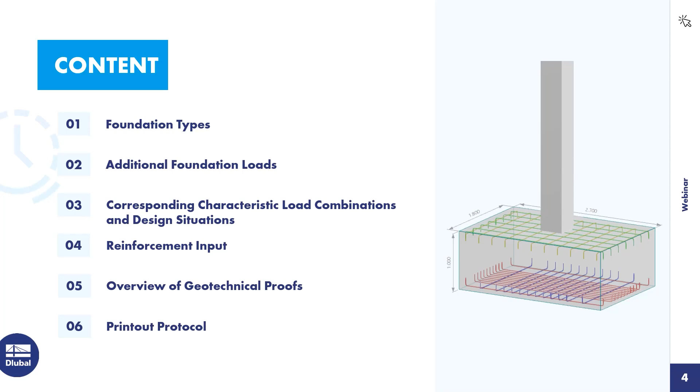I already created a steel hall with concrete columns and concrete foundations for you. First, I will show you the basic settings where the foundation add-on needs to be activated. You can find it here at the top. Under the add-ons, you need to make sure that the concrete foundations are activated. Concrete design doesn't necessarily need to be activated, but since I have a model with concrete columns here, I activated this for this webinar. However, for the design of concrete foundations, you do not need this.

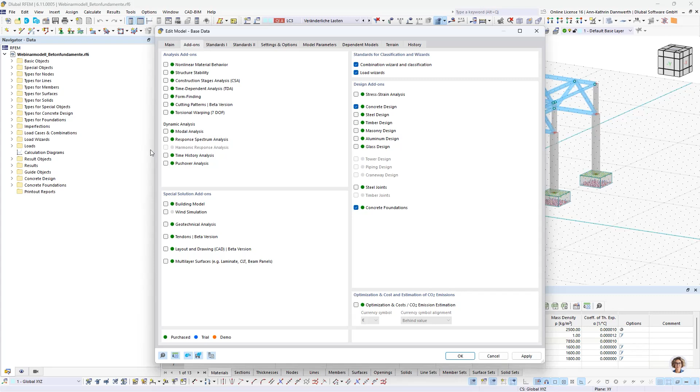Once the concrete foundation add-on is activated, we get new folders in the navigator, which I will now show you. Here we get the types of concrete design. Normally we won't get effective length, reinforcement directions, surface reinforcements, or punching reinforcements here, but only the concrete durability, as we need this for the foundations. Additionally, new types for foundations have been added. Here you can create foundations individually and edit them.

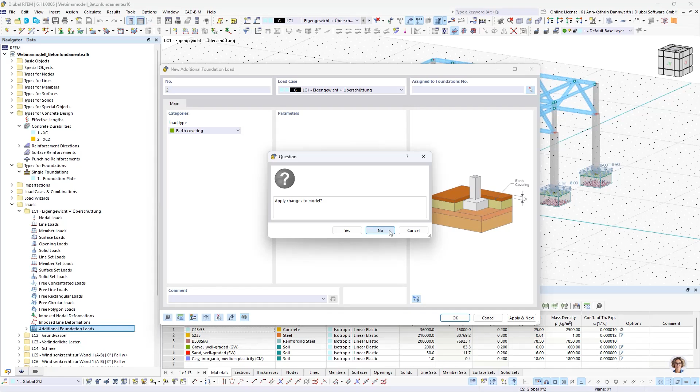Also under loads, when I go to load case, a new point for the additional foundation loads has appeared. Here you will find everything such as earth covering, surface loads, line loads, concentrated loads, and groundwater. At the very bottom, another tab for concrete foundations has appeared. Here you can view and edit the design situations as well as the objects to be designed and the design configurations for the geotechnical proofs or concrete design.

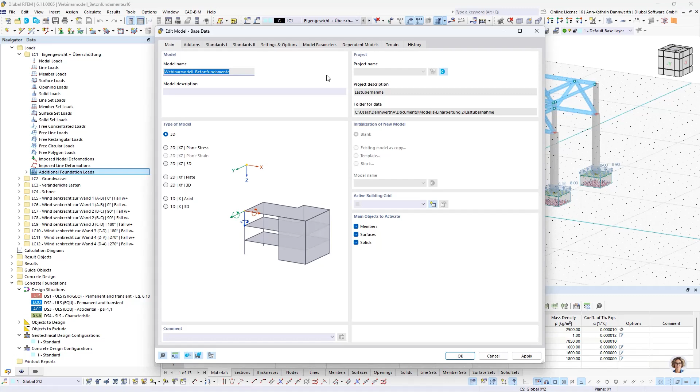What I forgot to mention in the basic settings is that if you want to generate snow or wind loads using our load generator, it would be helpful to provide your location or these data under model parameters. If you don't want to enter them manually, you can simply select the location on the map and the latitude, longitude, and altitude will be automatically filled in, but they can also be modified here.

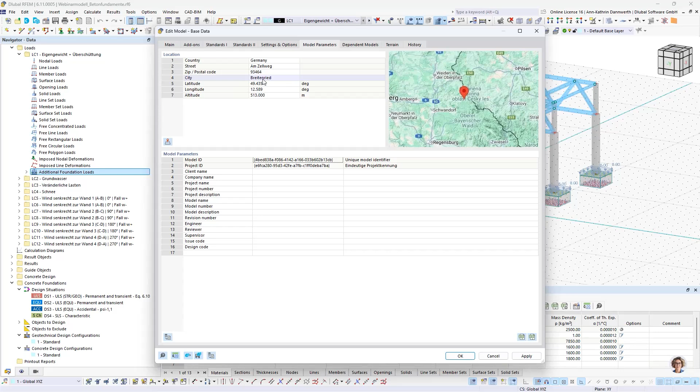I will show you now what has been modeled so far. Let's go into basic objects and materials. Here I have steel, concrete, steel for reinforcement, along with three different soils. When creating a new material, we can go to the library to load all kinds of soils. You can find them here under material type soil.

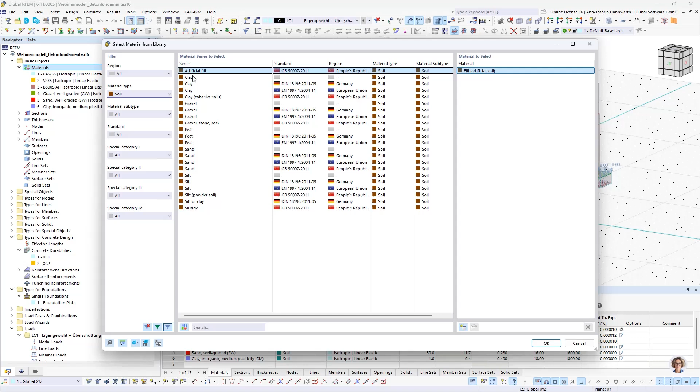I simply pick one of those now to show you the basic model parameters. However, you will likely receive different values from your soil report, so you can easily change the values in the material properties so that they are correctly considered in your verifications. Next, let's move to the cross sections.

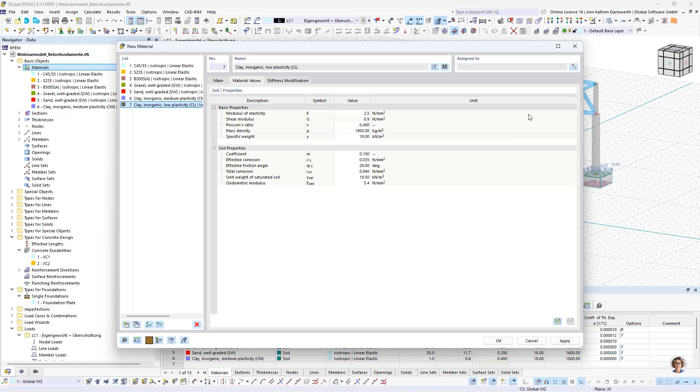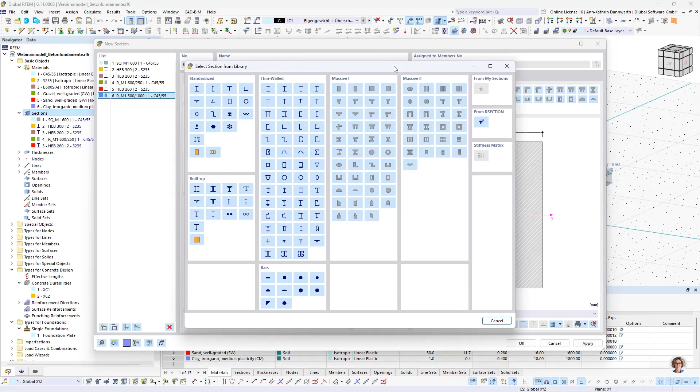I've created 2 rectangular cross sections made of concrete and 3 different HEB beams. They can also be easily loaded from the library, just like the materials. Here you have different selection options.

From this point on, it becomes interesting for the foundation modeling. Foundations must be assigned to supports. To do this, I will open the support type for nodes folder and access the nodal support. I've already created one here. I can either create a new one or edit the current one.

So I have now set my support with my support conditions and would like to assign a foundation. To do this, I need to check the box foundation. When I do this, I get a new tab for foundations, and now I can select the foundation I want or create a new one. However, there is another way to create it. I will walk you through that method.

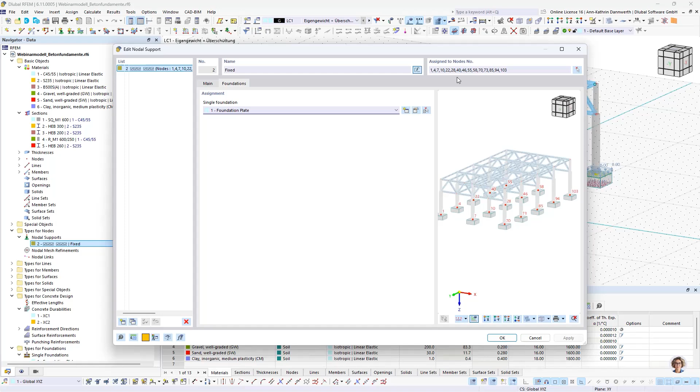The one here has already been prepared and defined. At the top, you can see all the nodes assigned to the support, and this foundation is then assigned to the support. Accordingly, these are also the nodes for which the foundation slab is defined. Now I will go to foundation types and create a new single foundation.

Here you can determine the type of foundation, which can be a foundation slab with or without reinforcement, a block foundation with smooth bucket sides or with rough bucket sides. You can also, when you select one of them, see the graphic over here. Then we have bucket foundations with smooth bucket sides or with rough bucket sides.

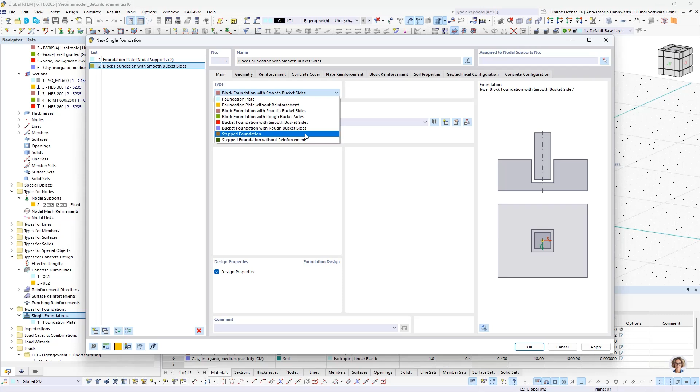And newly implemented are stepped foundations, again with and without reinforcement. So far, only the geometry of the step foundation can be determined, as this type of foundation is still under development. Let me go to the foundation slab now. In the second tab, you can create the geometry.

You can define the slab geometry with the dimensions of the slab and the slab thickness, as well as the eccentricity of the column above it. If a node or support has already been selected, the support dimensions will already be filled in here. The program automatically retrieves them. You can also define a base plate at the foot of the support.

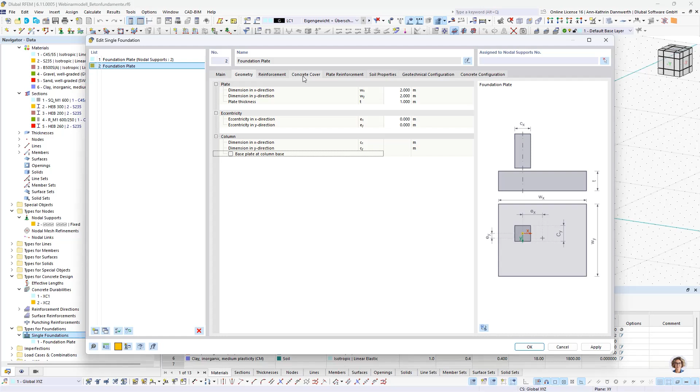This is very helpful because in the steel joints add-on, the geometries are also directly transferred, and anchors or reinforcements can be applied and designed there. I'll say something about the reinforcement later. Let's go back to the concrete cover. This can be controlled via this tab. Here you can also see the durability.

You can set different minimum concrete covers for the top, bottom, or sides. These values are automatically determined by the concrete durability settings. Alternatively, you can set these manually and adjust them as needed.

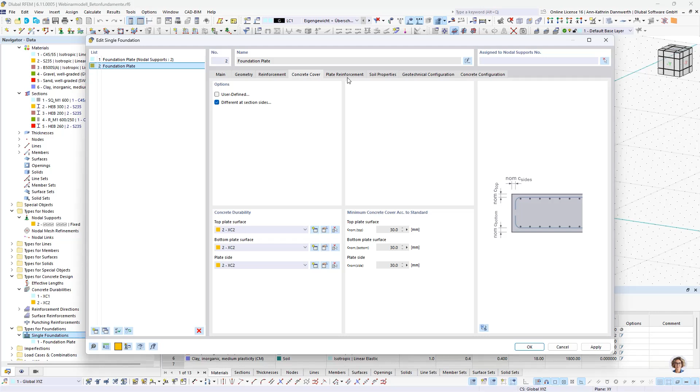Next, let's move to the soil properties. Here you have the settings for the subsoil. The conditions can be created as drained or undrained. For the definition type, you currently only have the single layer option. The multi-layer option is still in development. This can then be controlled through boreholes, or if you have the geotechnical add-on, you can define them in the future via a soil massif.

Here you can also set the soil parameters for friction angles, groundwater level, and earth covering. However, I first need to pre-enter something in the soil layers. The gravel was automatically selected because it's the first material of the soil type. So that would be region A below the foundation. Region B would be beside the foundation. I can define that here. I'll just add sand for now.

If I want to have earth covering, I also need to fill in region C. Then there is the option of earth covering here, and I can enter the thickness. Let's say it's 1 meter. I can see that directly here. That's 1 meter above the foundation node.

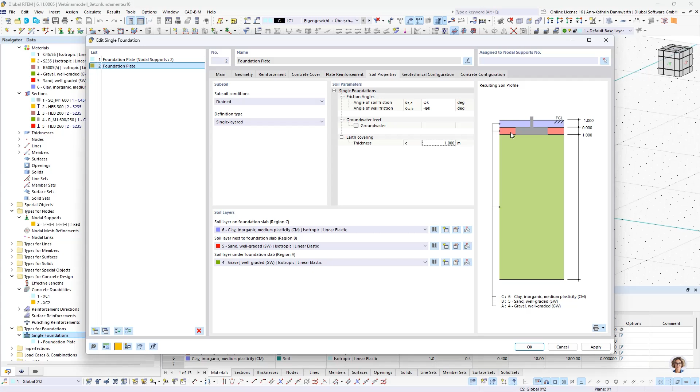Now let's move on to the geotechnical configurations. Here you'll find all the safety factors and other factors you need for design verifications. These can be controlled by reviewing or editing the geotechnical design configurations. The parameters you just saw can be set here in the standard parameters.

In the basic settings, you can also deactivate design loads if you don't want them. You can also assign different design configurations to different foundations. Accordingly, you can decide individually for each foundation which settings should be activated or deactivated for the foundation design.

For ground failure, there are two options for determining the ground failure resistance. It can either be calculated according to the code, or you can manually enter a characteristic value. For the sliding verifications, there are also adjustment options. Here you can control whether the equilibrium, uplift, or the large eccentricities should even be considered for the verifications.

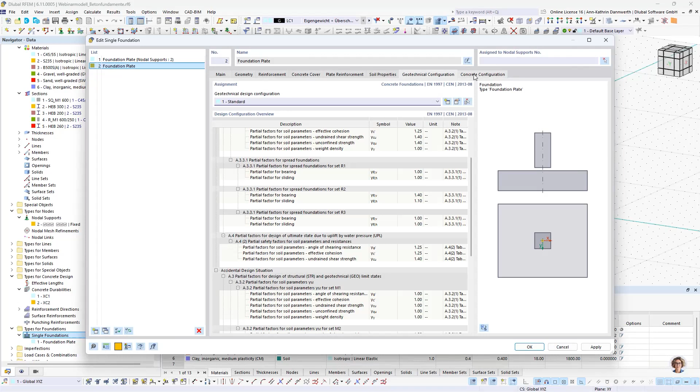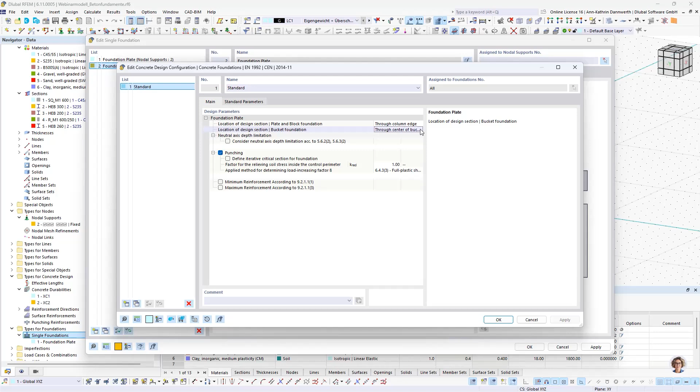Now let's move on to the concrete configurations. This section is similar. There are many safety factors here, as well as material parameters and ultimately everything we need for the design. You can adjust these here. In the basic settings, you can also determine whether punching shear should be considered in the design and how the handling of the minimum and maximum reinforcement should be managed. The position of the design section can be set here at the top.

Now let's move on to the additional foundation loads. To do this, I will go to the Loads folder into load case 1, and here to the additional foundation loads, where I will create a new one. For the load types, we have surface loads, line loads, and concentrated loads available, as well as earth covering and groundwater. The surface load can be applied to the entire foundation by simply assigning the foundation and setting the load size.

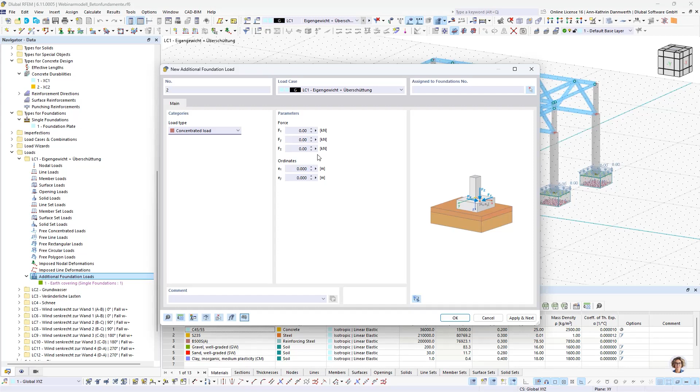Line loads are similar, but here you can also define 2 points on the foundation between which the line load should act. These ordinates have the node of the foundation as their center. Let's move on to the concentrated loads. This works the same way. You can determine the location of the concentrated loads through the ordinates, again depending on the node of the foundation, and define the components in the X, Y, and Z direction.

The earth covering is automatically generated by the system. You can control this through the soil properties when editing the foundation itself. The same goes for groundwater, which is also automatically created. I will go back to show you.

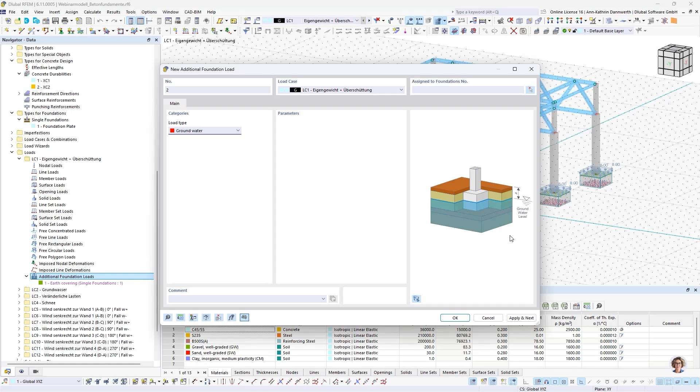In the self-weight load section, I have enabled earth covering, and that's why it appears purple here, since it has been automatically generated. If I go back into the foundation, into the soil properties, this is where I can define it. The weights from the earth covering are also considered here. So there's no need to calculate the earth covering or convert it into a surface load manually.

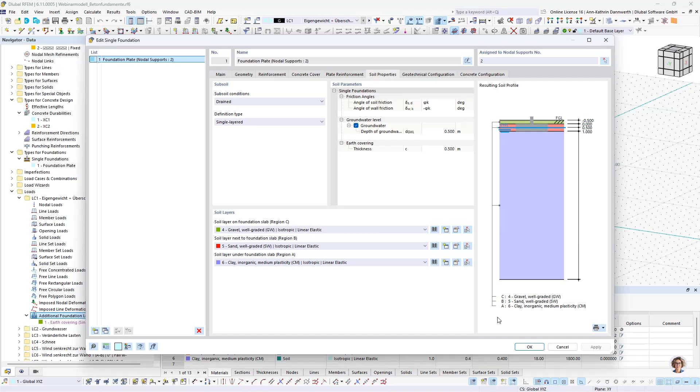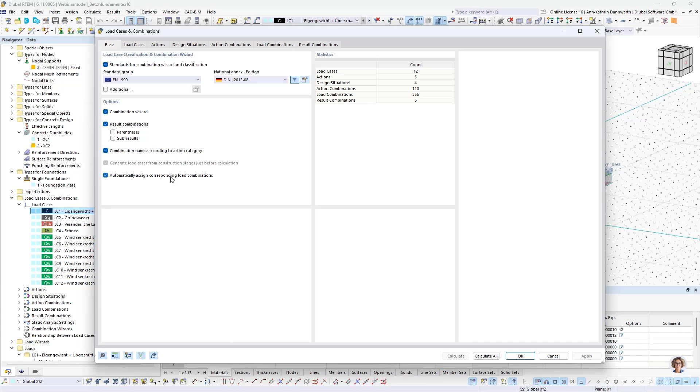Now, let's move on to the corresponding characteristic load combinations and the design situations. To do this, I will go into the load cases and the basic settings. If the combination wizard is enabled, the box for automatically assigned corresponding load combinations should also be checked. Accordingly, you will later have the load combinations generated by the combination wizard in the load combination section. Therefore, you will later find the combinations generated here, and the corresponding combinations should also appear.

The ground failure and the sliding safety verifications can only be carried out with the assignment of these characteristic loads. Manual assignment is also possible. So if you don't want to use the load combinations from the combination wizard and prefer to create them manually, you can also add the corresponding characteristic loads via this drop-down menu here.

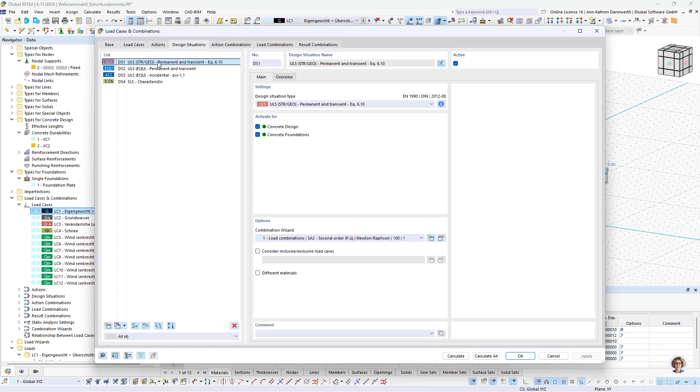Now, let's have a look at the design situations. For the geotechnical verifications, we need the ULS, ultimate limit state, for permanent and transient loads. We also need the design situation for equilibrium of structures for both permanent and transient loads. You can set all of them here. In addition, the one for accidental influence, and of course the characteristic one, which we definitely need to assign.

What I forgot to mention earlier is that for the additional foundation loads, we need to activate the self-weight for the concrete foundations in the load case, where the earth covering should also be considered. This will add a new tab at the top. When we go to this tab, we can specify exactly what should be included in load case 1. In this case, I added the active self-weight of the foundation structure to the self-weight and included the earth covering.

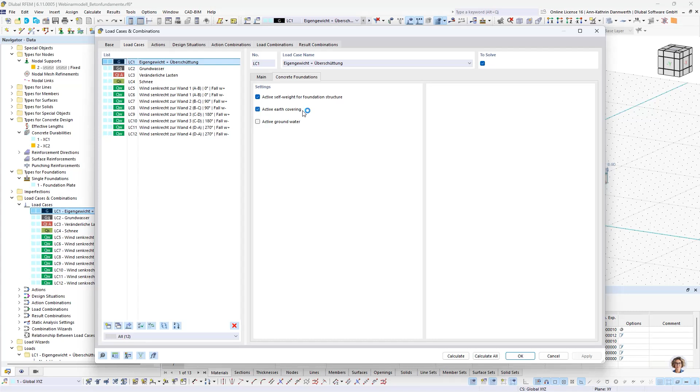I placed the groundwater in a separate second load case because it can also positively affect the verifications. You can see that here. Now only the active groundwater is included in this load case.

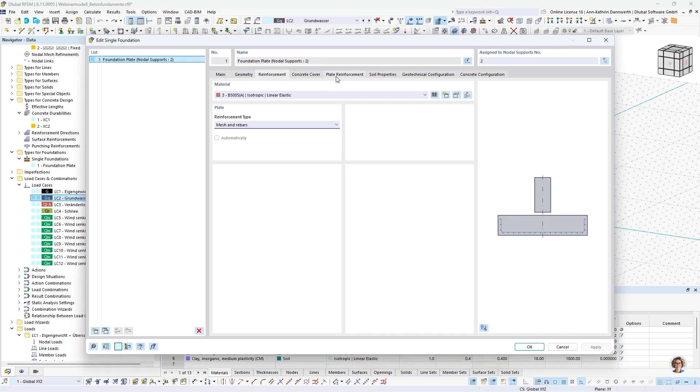Now let's go to the reinforcement input, which I skipped earlier. For the foundation plate, you can define the material and the reinforcement type here. As mentioned earlier, you can choose from mesh reinforcement, reinforcement bars, or a combination of both. I've chosen a combination of both here. I will then go into the plate reinforcement. Here I can define what I want to lay for the upper and lower reinforcement individually.

First, we have the definition of the mesh. Again, there's a selection of various meshes I can choose from. The bars can also be defined in the X and Y directions, with diameters and spacing. The same applies to the lower reinforcement. Here I can define the mesh and the bars in the X and Y direction. What might be interesting here are the areas 1 and 2.

Area 1 is the outer quarter, both left and right. Area 2 is the middle section.

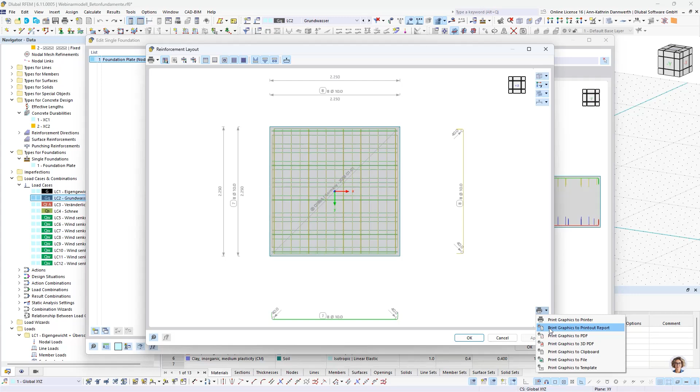But I will talk more about that shortly.

I also wanted to show you the reinforcement input for the bucket foundation. Here I will choose a bucket foundation. The geometry does not yet have a support because I have not assigned a node or a node support yet. I will do that quickly.

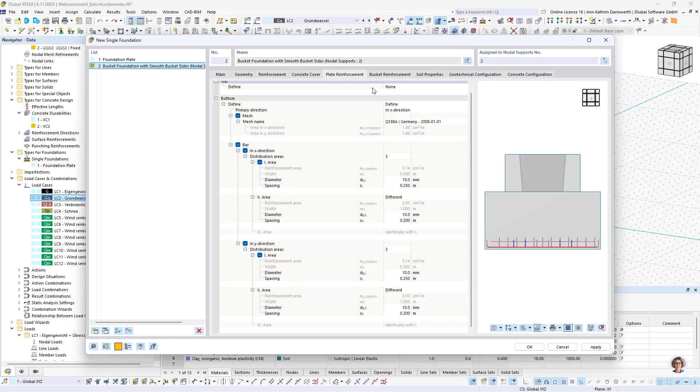Now we can go into the plate reinforcement. It looks the same as with the foundation plate. The bucket reinforcement has now been edited as well. Here you can define the horizontal stirrups first. You can also define the vertical stirrups in the walls in X and Y direction.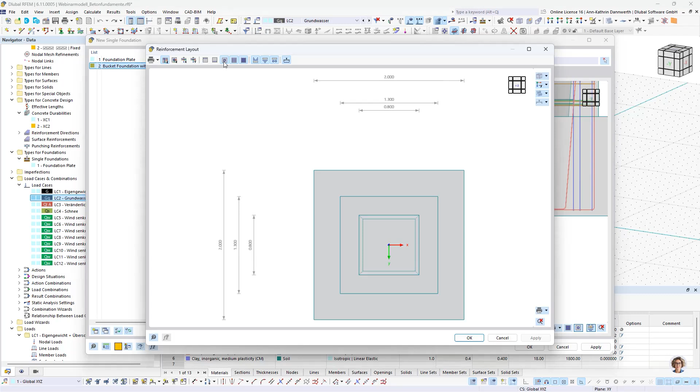Let's take another look at this. To display the bucket reinforcement, this button must be activated. I've turned off the other two for now. And here you can choose between different views to display the bucket reinforcement in all three views.

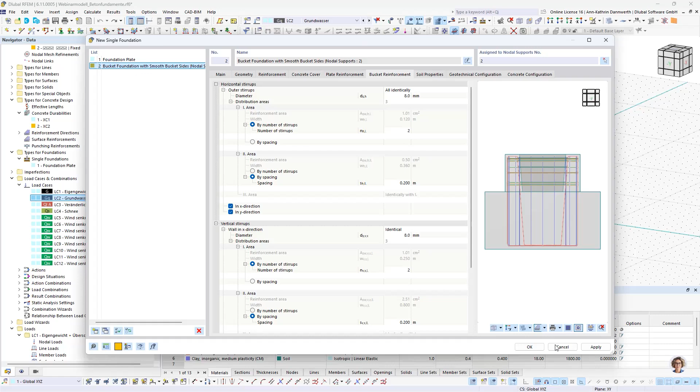Next, I'll give you a more detailed overview of the geotechnical design checks, which are an essential part of evaluating the foundation stability and safety. I already had the system perform the necessary calculations in advance to save time.

I will go ahead and turn on the results here and navigate to the concrete foundations. In the overview, you can see that one of the design checks has not been fulfilled. I'll go into more details on that shortly.

Here you can view an overview of the relevant results, which gives you insight into the performance of each foundation. This overview is sorted per node number. Additionally, it shows which design checks have been carried out for each foundation. Let me make this a bit smaller so we can clearly see the names of the checks as well.

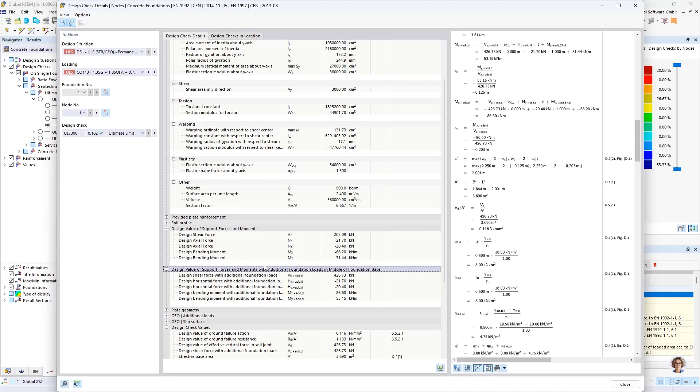First, we have the ground failure design check. When I go into that, we will see the complete calculation process for this specific check. All the necessary details are provided here, including cross-section values and design forces that contribute to the calculation. This helps ensure that the foundation will remain stable under the given loads.

Let's take another look at the top here, where you can find these results. In the navigator under Results, you can easily view the geotechnical design under the Design Check section. Specifically, in the ultimate limit state, you will find the number UL 7300, which corresponds to the ground failure design check.

If we click on that, you can view the utilization for each individual foundation. This will show you how close each foundation is to reach its limits. Additionally, you can also see individual stresses here, which provides an understanding of how forces are distributed across the foundation. If necessary, you can also view the failure figure, which helps identify the exact area of concern.

Moving forward, I also have the sliding design check, which is another important aspect to consider in the evaluation of foundation stability. You can also view this design check for each individual foundation, ensuring that sliding movements are within acceptable limits.

Furthermore, here is the design check for the equilibrium of structures, which has been exceeded for some of the foundations. Since this involves tipping around an edge, you can also display which edge is critical or which design check has not fulfilled. Looking at this, I see that for these three foundations, tipping around the right edge has not been fulfilled.

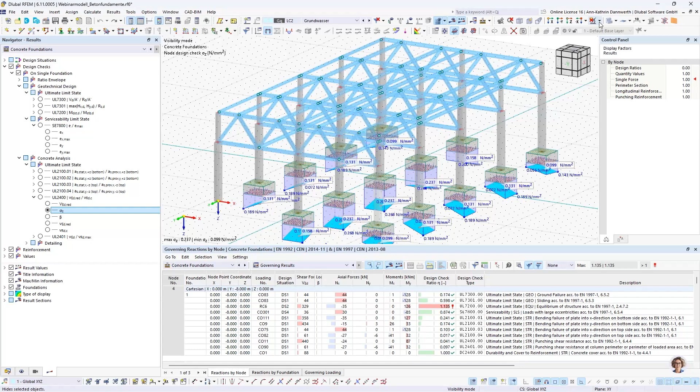Here is the stress distribution again, showing how stresses are spread across the foundation surface. Since I have several foundations in a row, I can also choose to display just one foundation at a time to get a more focused view, and see the exact stress distribution for that individual foundation.

I will hide this view now to keep things clear. Now, at this point, you can also display the reinforcement for the foundation in question. This will show you the type and distribution of reinforcement in the foundation, which is crucial for ensuring the foundation can withstand the applied loads.

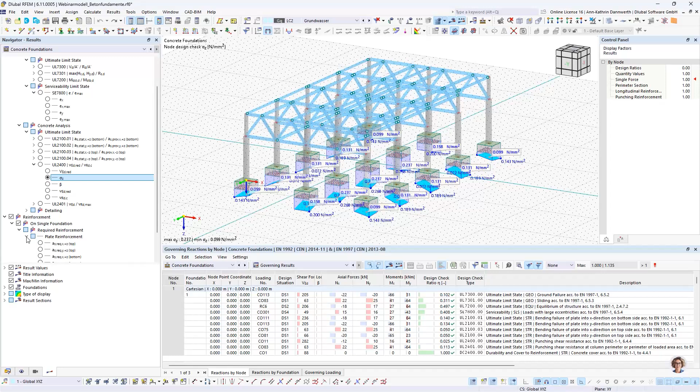You can view the upper reinforcement here, for example. This is the reinforcement in the X direction at the top of the foundation. Similarly, this is the reinforcement in the Y direction at the top. The lower reinforcement is displayed in the same way, providing a complete picture of how the foundation is reinforced.

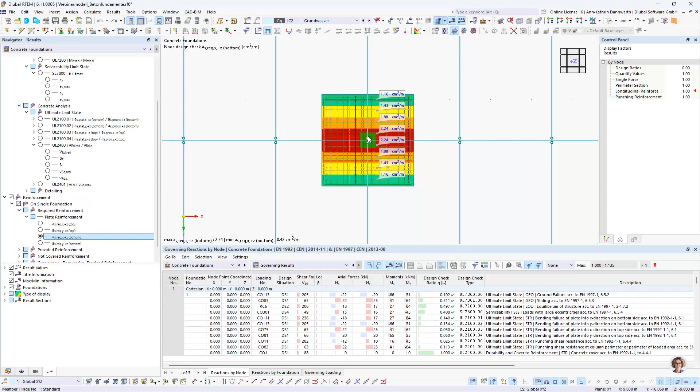Let me switch the model to wireframe mode so that we can only view it from the top. This view allows us to see how the reinforcement is distributed more clearly, where and how much reinforcement is involved, ensuring that every part of the foundation receives the necessary support.

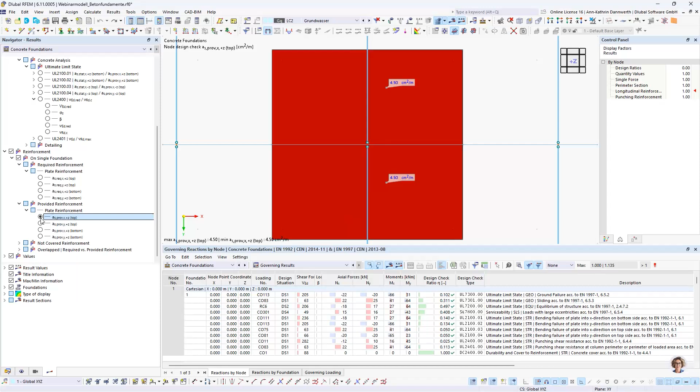The same applies to the existing reinforcement, which you can also display. You can view the top reinforcement in both directions as well as the bottom reinforcement in both directions. And you can also see here the uncovered reinforcement, which should be 0 everywhere, indicating that no areas of the foundation are left without adequate reinforcement.

This is done analogously for other types of foundations, as well as for the bucket reinforcement, ensuring the structural integrity of the entire foundation.

Now let's take a look at the printout protocol. I will create a new printout protocol here. In the printout protocol manager, you can manually decide what exactly should be included in the printout. I will start by selecting all, and then deactivating everything.

Now I will only select the items that are relevant for the foundations. So I've selected the folder types for foundations here. Let's see what we have. For example, I don't have rough bucket reinforcement, but I do have plate reinforcement. These are the relevant options for this model.

In the loads section, we also have the additional foundation loads that I'd like to include just to show you. Of course, I can select many other options, but it depends on your specific needs. Next, I can select the reinforcements, both required and existing. I will probably do this on a by-foundation basis, or the relevant results would be enough for me here.

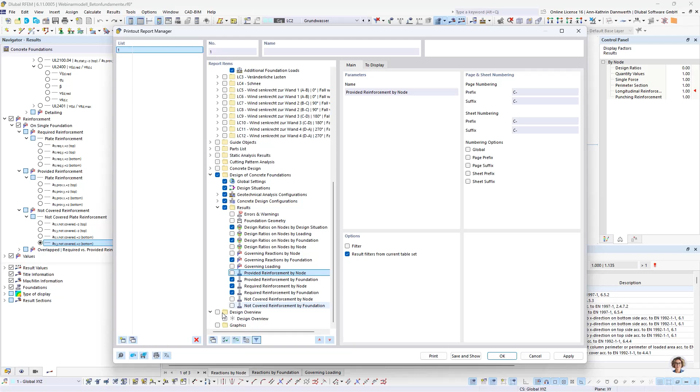I'd also like to include a design summary. Let me generate this now. This is how the printout protocol looks.

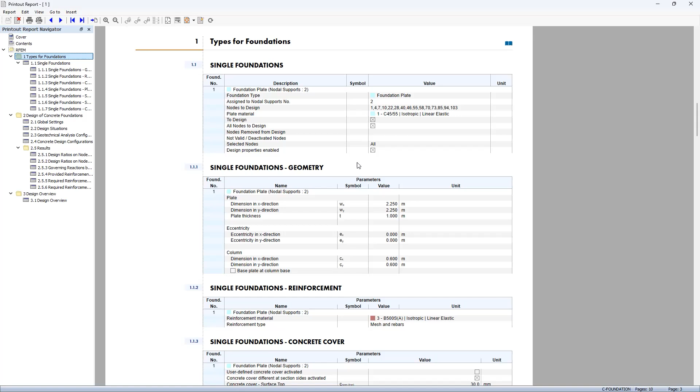Here we have the table of contents, and then it directly starts with the types of foundations. Here you can see again the types of foundations we have, which node they are assigned to, the material assigned, and then the geometry you selected. If you had several foundations, you would see a list with multiple tables like this.

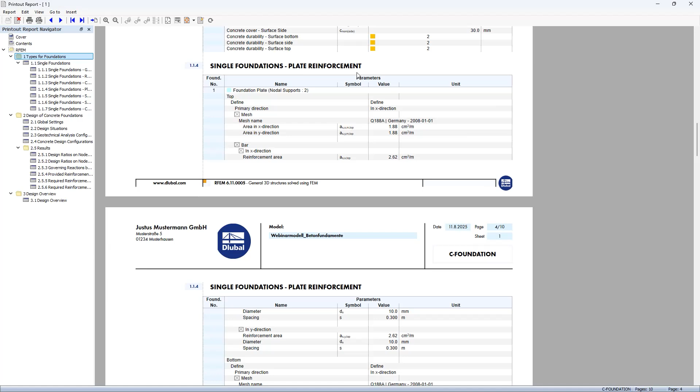Then we have the type of reinforcement, whether it's a mesh reinforcement or rebars, and the materials for the reinforcement steel. Next, we see the concrete cover for the foundations and the amount of reinforcement laid out, both in the mesh in the X and Y direction at the top and the bottom.

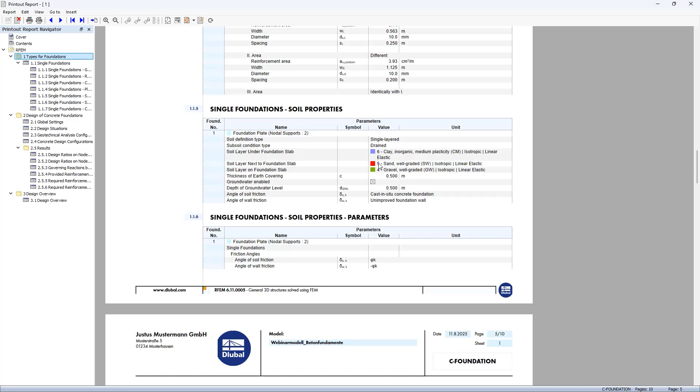You can also see the selected soil properties here, or rather the soil layers that we've chosen. This includes earth covering, groundwater, and the friction angle. Finally, we have the global settings. For example, the design approach is set to approach 2, which is relevant for the ground failure design check.

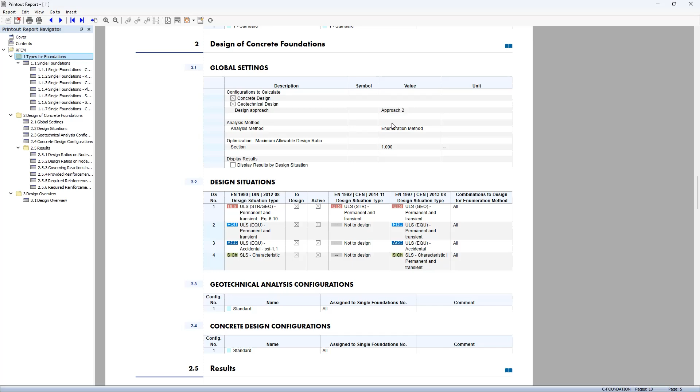I didn't show you the global settings earlier, so let me go back to the model to the foundations input. And then you will find the global dialog for settings. Here you can select the design approach. As I mentioned, this is important for the ground failure design check.

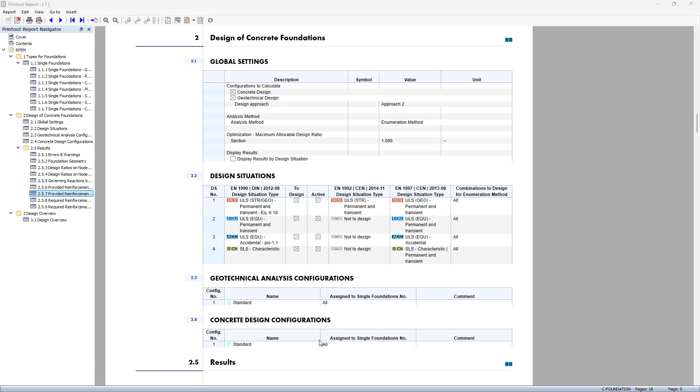Now I'll go back to the printout protocol. Here I have also included the design situations for ULS, the equilibrium of structures, as well as the accidental and characteristic cases. I've also output the configurations for the geotechnical analysis. Then here are the errors and warnings.

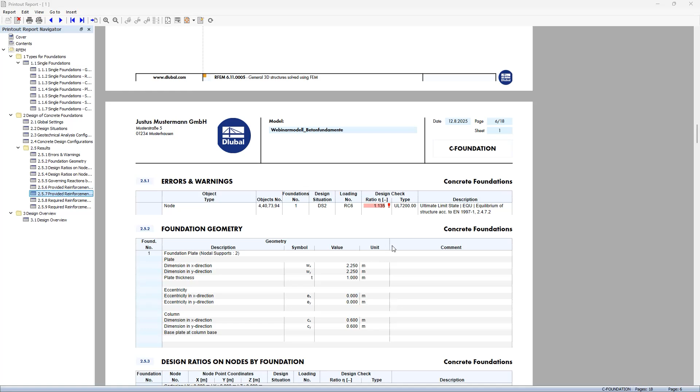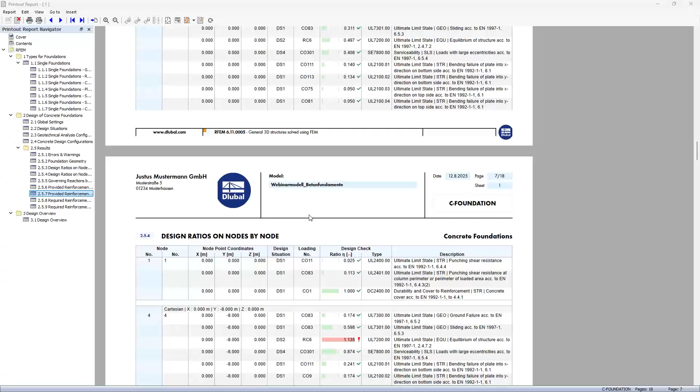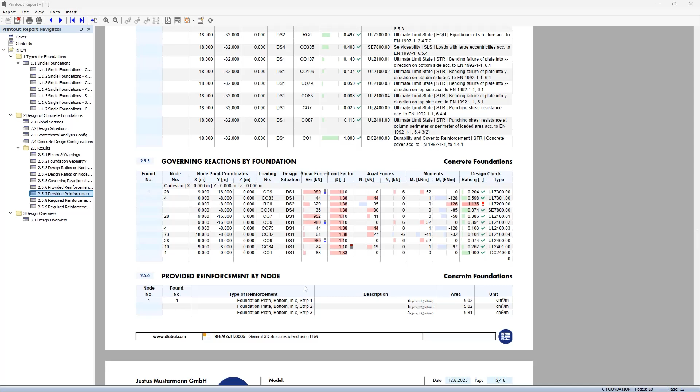The design check for equilibrium of structures was not fulfilled, as I showed you earlier. Next, we have the plate geometry and utilization at the nodes, node by node, in more detail now since we have a few node foundations. You can see in detail at which node, which foundation, in which result combination did not pass the design check. All the design checks are listed here, and as mentioned, there are quite a few right now.

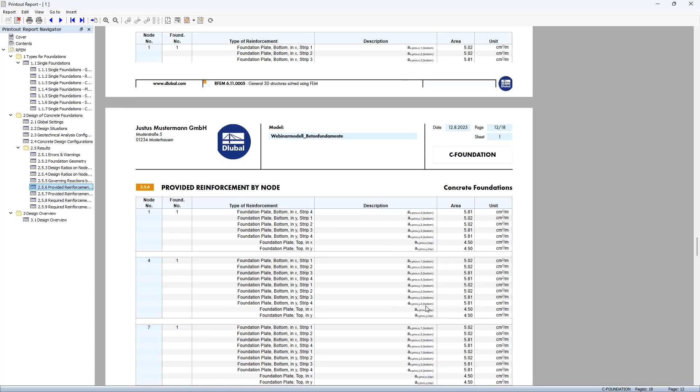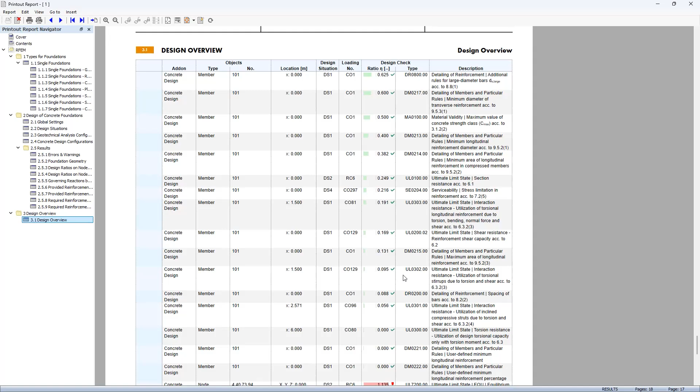Next, let's go back to the existing reinforcement. You will also see a list for the upper and lower reinforcement, then the required reinforcement is shown, followed by the design summary. There are no images for the reinforcement or the model included yet, except on the cover page, where you can briefly see the model.

Here you can also customize details like the project name, the client, and who created the model.

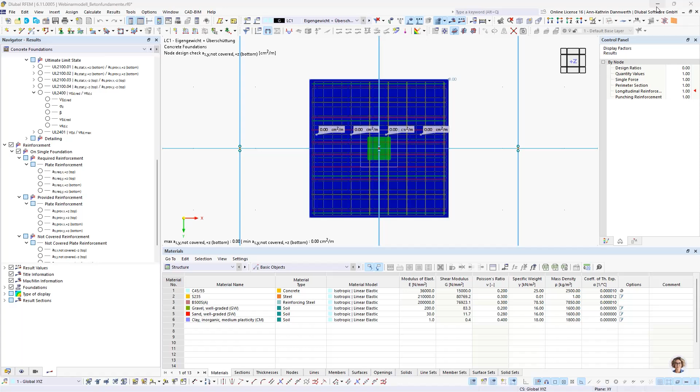Now I'm going to exit for a moment because I want to add one or two things to the protocol. To do this, I'll go into my foundation, go to the plate reinforcement, then to the details. I want to include the lower reinforcement first. I can do that by going to the printout protocol at the bottom. It's already there.

You can also give it a custom name here, just for lower reinforcement. Otherwise, I'll leave everything as it is. Then I'll also add the upper reinforcement to the printout protocol, so reinforcement on top.

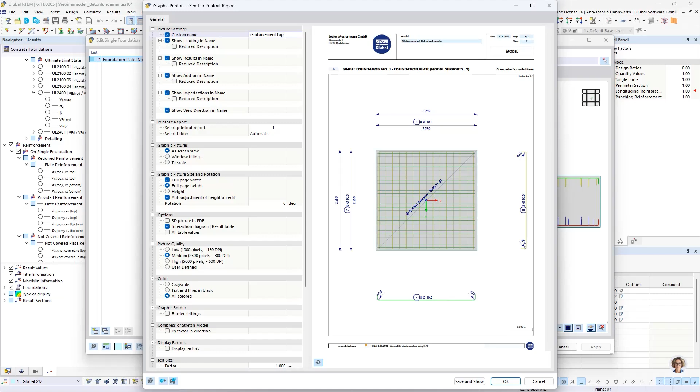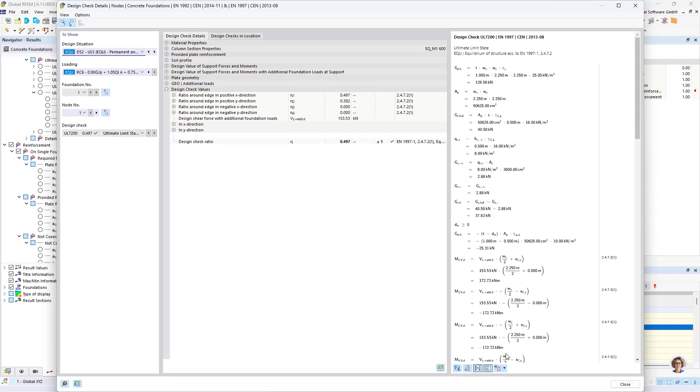Now I can also include individual design checks in the printout protocol. For example, I include the equilibrium of structures for node 1. Now I want to have this design check in the printout protocol, so I click into print to printout protocol. Now I'll switch back to the printout protocol to show the changes.

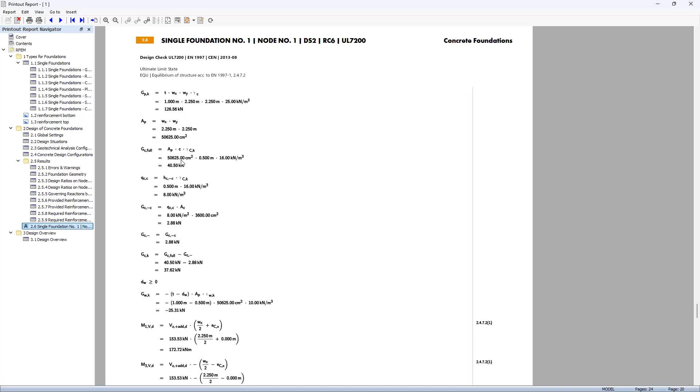So here at the bottom, I have the design check included under results, directly below the results section. Here you can follow the entire calculation process, and all the variable names are included as well. You can take another look at both the lower and upper reinforcement here.

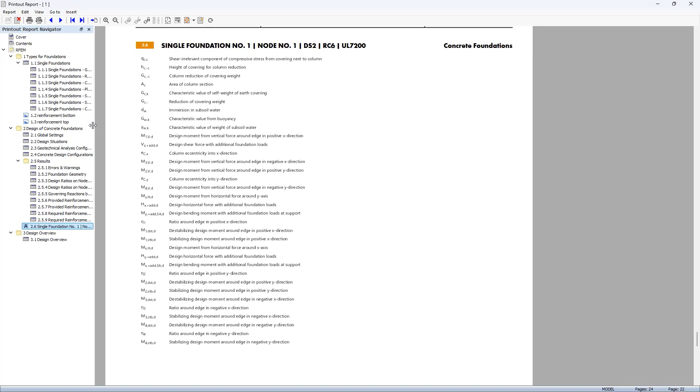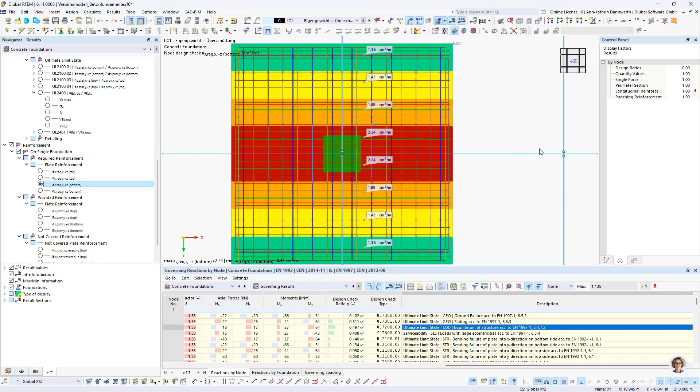Ultimately, everything you see in this display window can also be transferred to the printout protocol. To do that, I would first like to take the required lower reinforcement from the slab. I will hide the reinforcement bars, meshes, nodes, and supports for the view to make it a bit nicer. I can do that by going to Types for Concrete Foundations Reinforcement and simply clicking this checkbox. I don't need to see the node, and I don't really need to see the support right now either. This is the way I would like it printed.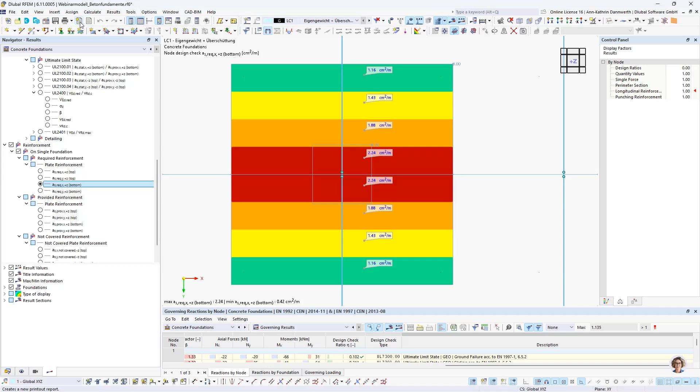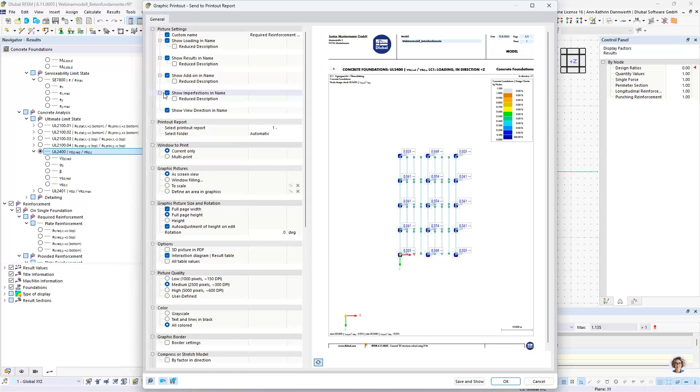Now I can go to the printout report at the top and get this view. I can directly print it into the printout report by pressing this button. I can do the same for any other design check as well. I will take the punching design check for now. Then I'll click print and select the area I want to show, since the view is not suitable for me. I can do that by simply clicking two points here.